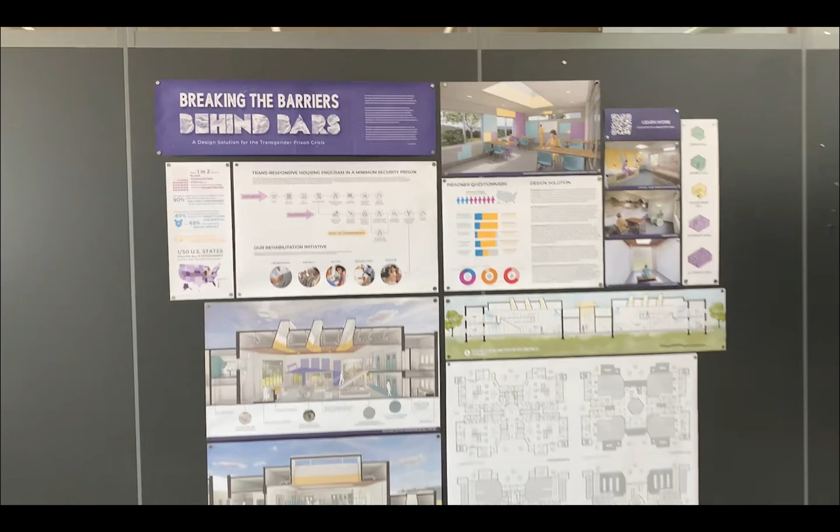I'm Mary Golden, the Undergraduate Program Director for Interior Design at Rochester Institute of Technology. We are delighted to welcome you all to our Capstone Defense session in support of Haley Giroux. To give a bit of context, Haley embarked on a self-generated design research project with the intention to respond creatively and imaginatively to an emerging circumstance, ongoing debate, and real-world issue relevant to the profession of interior design.

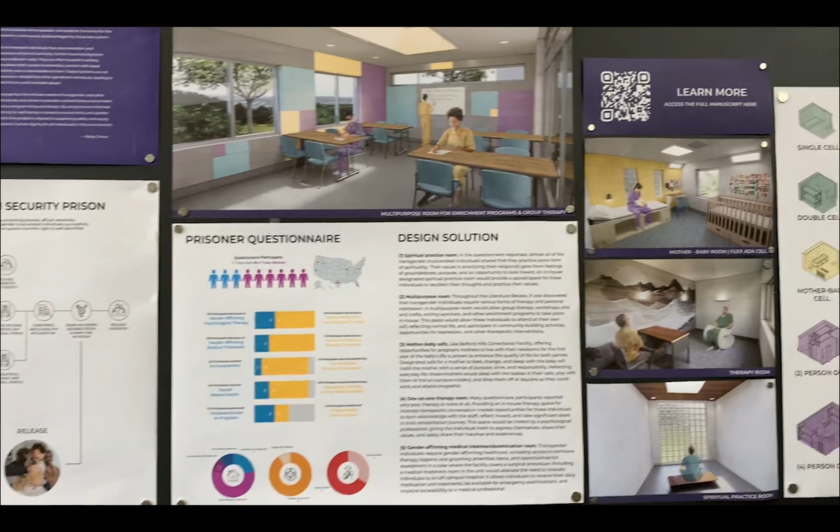She sought out and invited industry professionals to serve as her Capstone Committee members. The program is indebted to these remarkable individuals for their generous acts of service. On behalf of the program, thank you. Haley will introduce her committee in just a few moments. At this time, I would like to introduce our examining scholar, Barry Halperin. Barry is a principal architect at Beardsley Architects and Engineers in Syracuse, New York. Barry, thank you for joining us today.

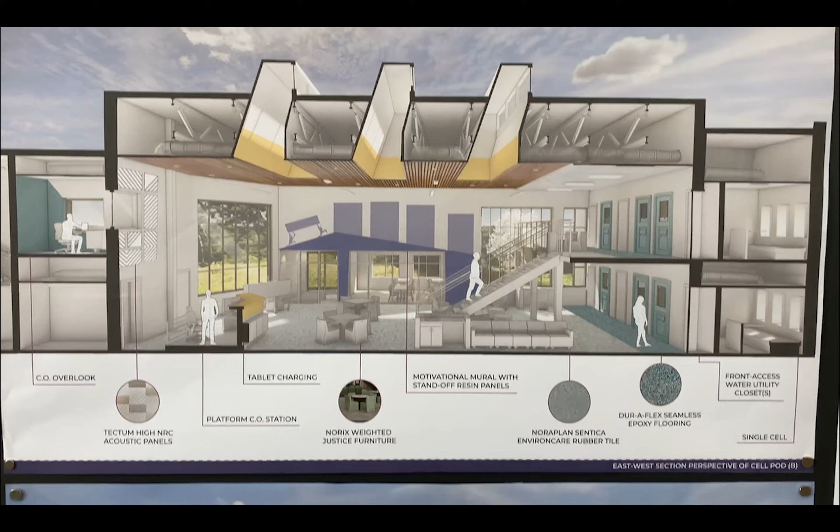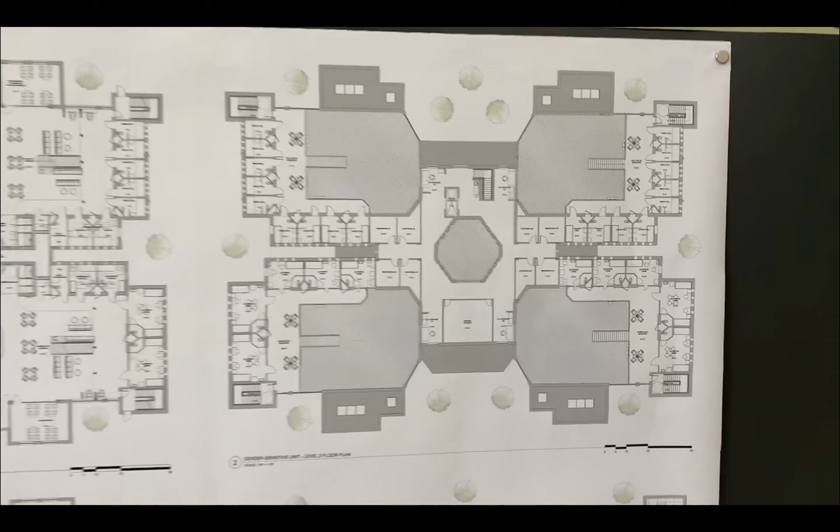Barry will begin the 15-minute cross-examination following the 30-minute student presentation, and the committee members are invited to provide their remarks at 5 minutes per person. To provide full focus on Haley, we respectfully request that all guests keep phones on silent and that Zoom and video microphones remain off for the rest of the session. Due to the formal nature of this presentation, we will not take questions from the audience. However, we do encourage everyone to reach out to Haley directly to share accolades and engage in conversation following the session. At this time, I invite Haley to present her capstone.

Everyone, my name is Haley Giroux, and I'll be presenting to you my interior design undergraduate capstone proposal, Breaking the Barriers Behind Bars. So I want to thank my committee for their guidance in this project, Mary Golden, our program director, Ann Weis, interior designer at LaBella, Adrien Moyer, the co-founder of the Transgender Resource Center in New Mexico, and Craig Johnson, a chief operating officer at Huther Doyle, and a special thank you to my consultant, Mark Kukuvka, a correctional architect at LaBella. So thank you all for being here today. We'll be touching on the question I'm trying to answer, the findings of the literature review and research agenda, and the creative agenda final proposal.

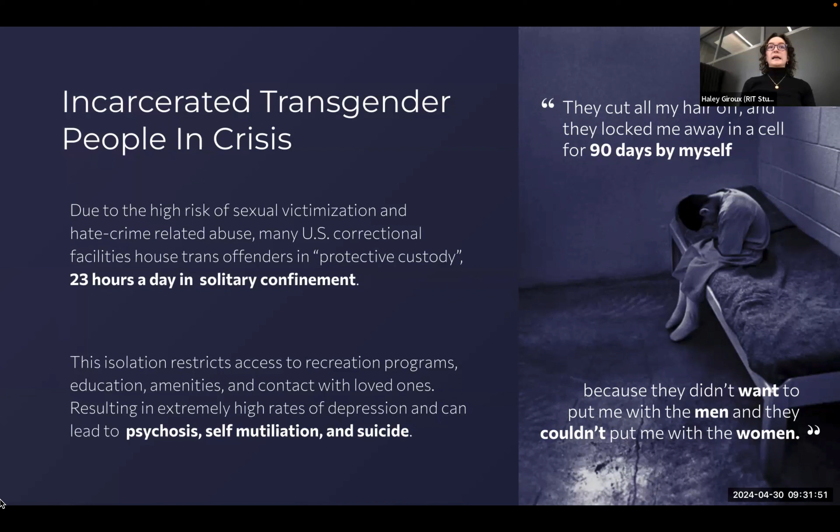So before we get into this issue, I do want to give a quick trigger warning that I will be mentioning sexual abuse. So the under-researched and controversial issue that I'll be addressing is the transgender prison crisis. Due to the high risk of sexual victimization and hate crime-related abuse, many U.S. correctional facilities have no other option but to house trans offenders in protective custody or solitary confinement, which is up to 23 hours a day. This isolation restricts access to recreation programs, amenities, and contacts with loved ones, resulting in high rates of depression and anxiety, and can lead to psychosis, self-mutilation, and suicide.

A study that was recently released in February of 2024 found that out of 280 transgender prisoners from across the country, 90% reported being housed in solitary confinement at least once during their incarceration. Separately, in a California general population unit, one study found that out of their respondents, 40% reported being forced into prostitution for survival, and 69% reported experiencing sexual assault.

Knowing about these struggles, in 2003, George Bush signed into law the Prison Rape Elimination Act, or PREA. This outlines 13 provisions to be followed in correctional facilities to protect this population. Only one out of the 50 U.S. states follows all 13 provisions. PREA states that placing a trans prisoner in protective custody is prohibited unless there are no available alternatives. And it's clear there are no available housing alternatives. So the question I want to answer is, can prison housing be reshaped by trauma-informed and gender-sensitive design principles to improve the security, well-being, and rehabilitative potential of transgender prisoners in the U.S.?

Now let's get into the findings of the literature review, which fueled the creative agenda. I explored 6 to 7 areas of research, but for brevity, I will summarize the pieces that informed the design. So I found that the traditional prison environment can create trauma because of the architectural hierarchy and the lack of privacy and abrasive materials. It also forces individuals to conform to the male-female binary system. Prisons are historically designed to be a part of punishment, but the system still expects people to get healthy from an unhealthy environment.

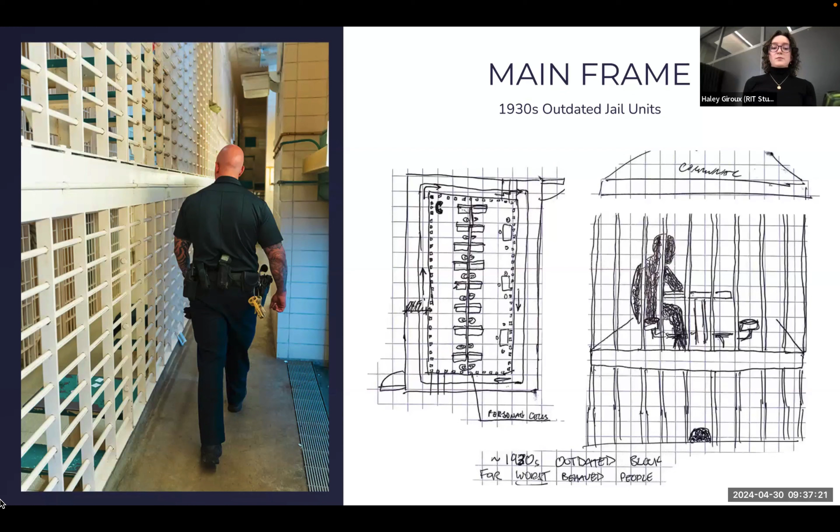This tour consisted of 2 parts. First part was the Main Frame, which was an outdated 1930s jail that housed the most abrasive prisoners. This environment was not conducive toward rehabilitation. It actually created opportunities for aggression and trauma response. The air was thick and it smelled bad, and the bars were sticky to the touch. And the sounds echoed so immensely that when the door closed, it reverbed from across the room.

The second part of this tour was the Tower Plaza of the Veterans Unit, which was opened in the early 2000s and was recently renovated. This environment was far more comfortable and the air was clean and fresh with a ventilation system. The newly installed carpet and ACT ceiling grid aided in the acoustics. But I noticed that there were still no windows in the day room.

The visitation phone call area was on the mezzanine, which wasn't conducive for ADA or differently abled individuals. And there were columns in the day room that created a lot of blind spots. And so these were areas to consider in the design proposal.

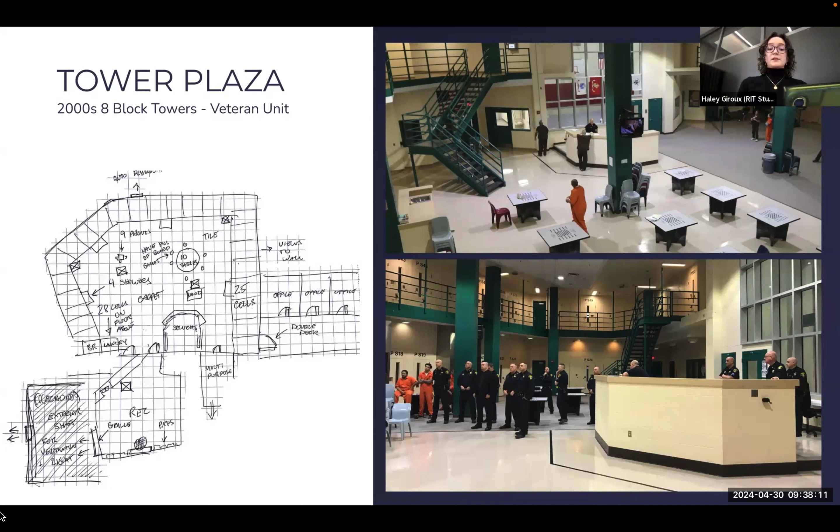Now, the last and very impactful piece of this research was a questionnaire I mailed to 22 different transgender prisoners across the country. This questionnaire gauged their gender identity, personal values, experiences with their living quarters, showers, and bathrooms, and their mental health. But for brevity, we'll review the stats that impacted the creative agenda, but if you'd like to learn more, please see the poster and the manuscript. So 10 out of the 22 prisoners agreed to participate in the study from all over the US.

It was found that most of the preoperative transgender prisoners were housed based on their biology, except for one trans man who was housed in the male unit and one trans woman who was housed in the female unit. Now, this trans woman was an outlier in this study because she was housed in solitary confinement for protection. She described her cell as having peeling paint and cockroaches, and she had poor gender-affirming healthcare amenities, and she still had to shower in a public shower.

Now, it was found that only 3 out of 10 transgender prisoners had access to a private shower, which conflicts with the Prison Rape Elimination Act. And we'll talk more about how the participants' input influenced the creative proposal.

Another piece of this questionnaire was I prompted the respondents to draw their living quarters. This discovered that some cells were so small that only one person could move at a time, and most of them reported only a slim barred window, and everyone had a roommate unless they were in solitary. These findings helped refine the scope of the creative proposal by programming spaces to match their personal values and take into consideration their experiences in their living quarters and shower facilities. So now let's get into the final proposal.

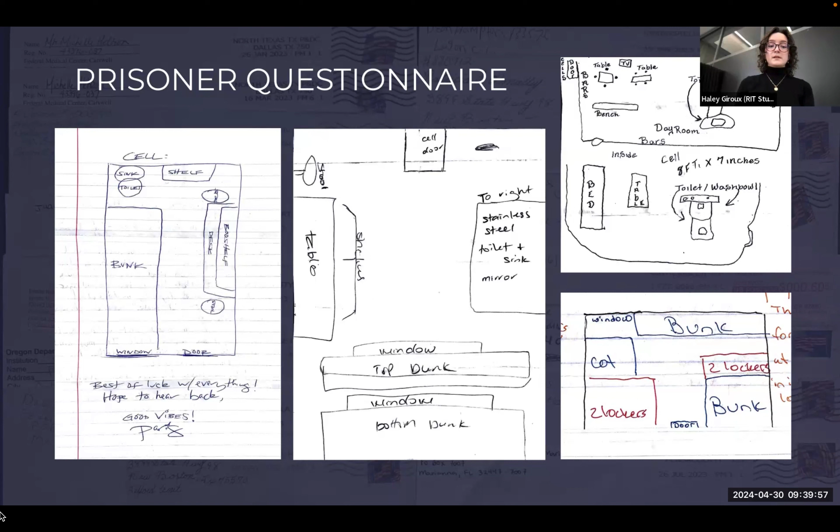I propose that a gender-sensitive unit model designed to be trauma-informed, gender-sensitive, and prioritize security and rehabilitation can help reframe the housing of transgender prisoners. The first decision that was made for this space was the model of the type of facility.

It was decided that a minimum security New York State prison was the ideal model for a gender-sensitive housing unit, and this is because a county jail's turnover rate is too high, and federal prisons house people that might be on life sentences, meaning they won't be conducive for rehabilitation and reentry.

A minimum security prison gives the designer the most agency to include gender-affirming programs, and the population is most inclined to want to be rehabilitated and returned to their families. An important piece of this program was, research shows that transgender individuals are often miscategorized when placed in facilities, so a program was created for this minimum security prison to address the housing assignment.

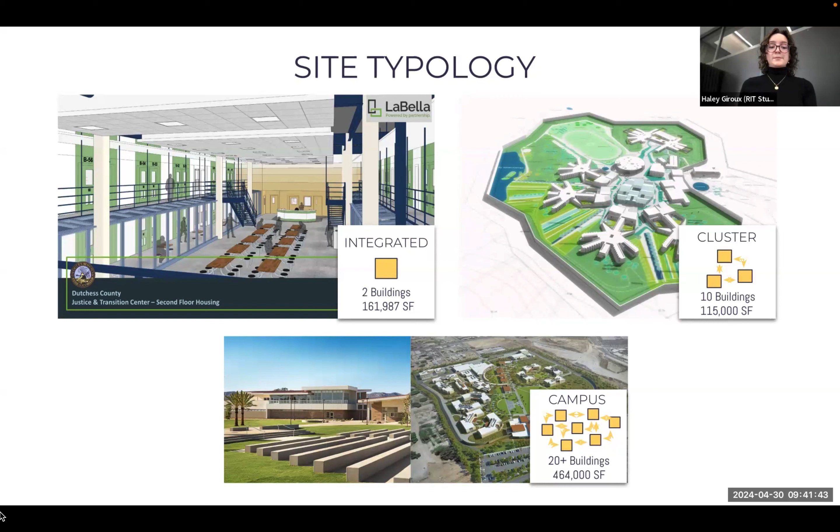So next is the site typology of the prison itself. After studying an integrated typology and a cluster and a campus typology, it was decided that a cluster campus would be the ideal model for this program. This is an example of a site of a cluster campus, and this basically means that there's a small array of buildings around a central focal courtyard.

This is an example of a cluster campus, meaning there are separate buildings that are rotated around a central courtyard, and each have different programs. So this site is conducive for rehabilitation because it reflects everyday life. Prisoners have the agency to leave in the morning for work and classes, walk around the courtyard to their destination, and keep a schedule that is similar to life outside of prison. Research shows that reflecting normal life gives prisoners responsibility and prepares them for life after release.

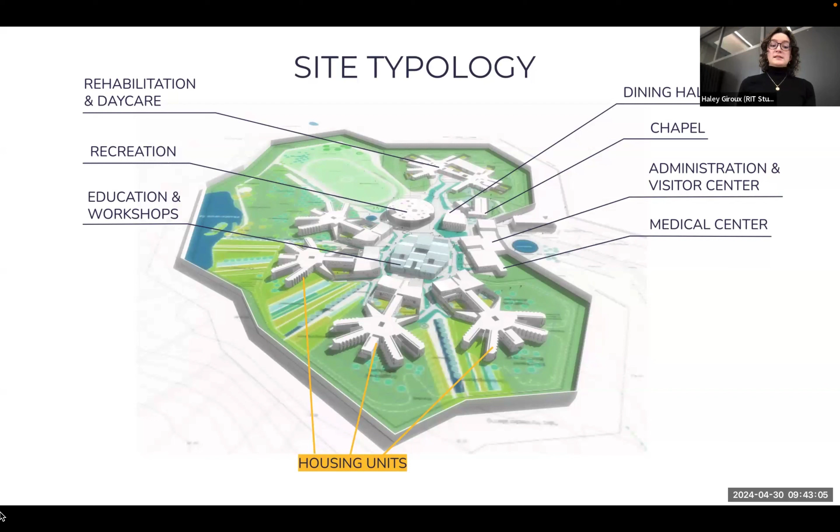Now, this project only proposes a solution for the housing unit, which is one of the many buildings on the site. This means that this space will mostly be used in the mornings and in the evenings before and after the workday. Now, this proposal is a replicable building that can be copied and pasted onto any New York State minimum security campus. This means that it can be used in a men's prison or in a women's prison, but not both. It is designed to use for either demographic.

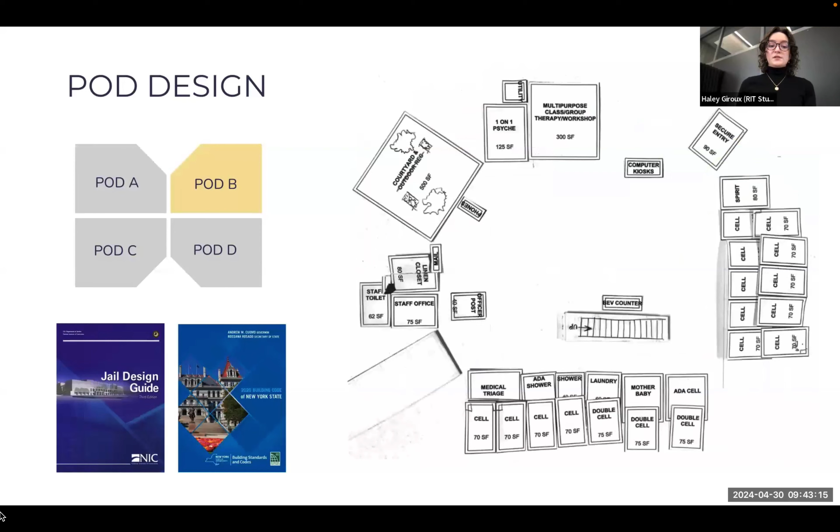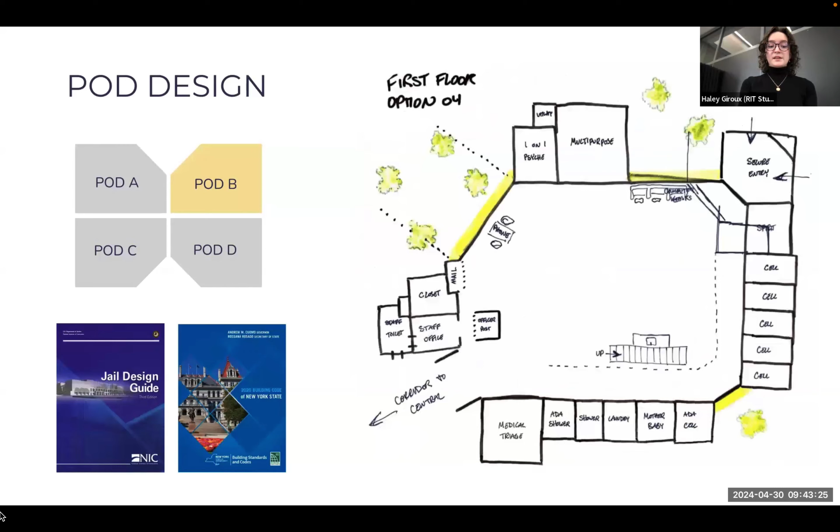So the design of this housing unit began when deciding on a 4-pod unit, each housing 20 prisoners. Using the jail design guide, the Building Code of New York State, and a sample housing program from a LaBella project, this program was assembled, allocating the minimum amount of square footage per space, then printing out these spaces to scale and organizing them like a puzzle, exhausting every solution until I found one to be the most successful, and bringing that up into 3D using foam.

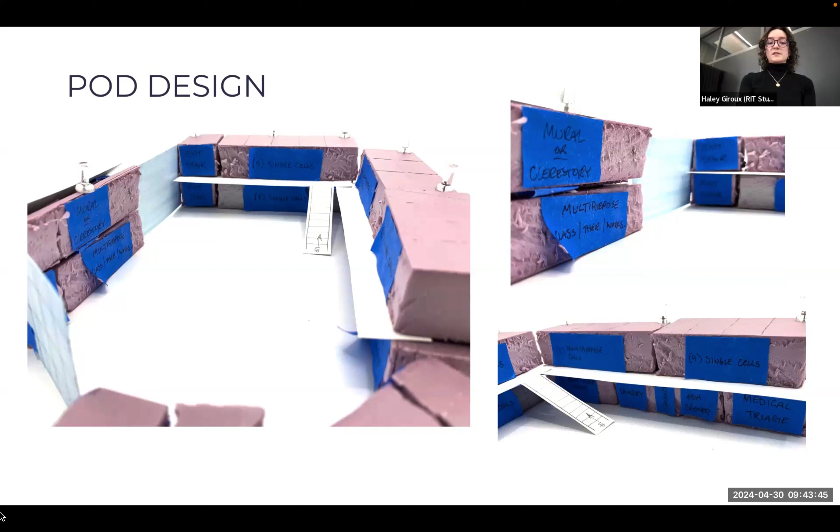So this foam model allowed me to design for vertical circulation, egress, architectural forms, space adjacencies, and circulation. So this is what an AI-generated rendering might look like of the exterior of the housing unit. Notice that the walking path leads from the center courtyard into the facility.

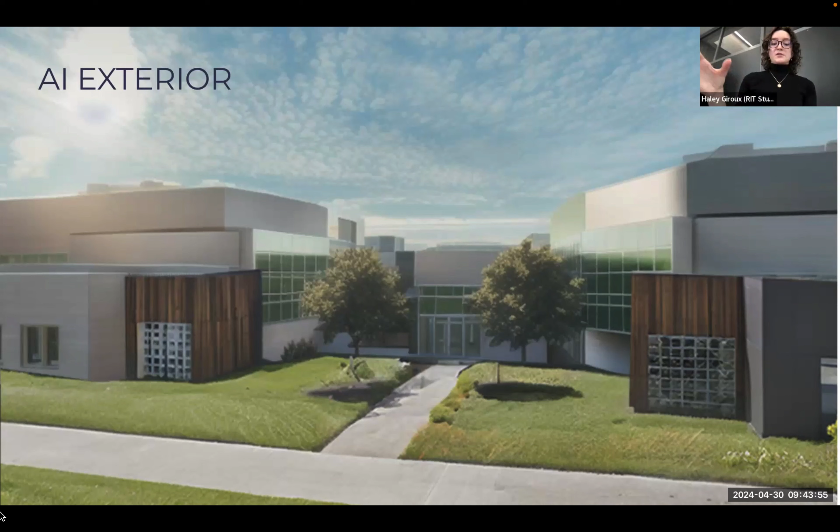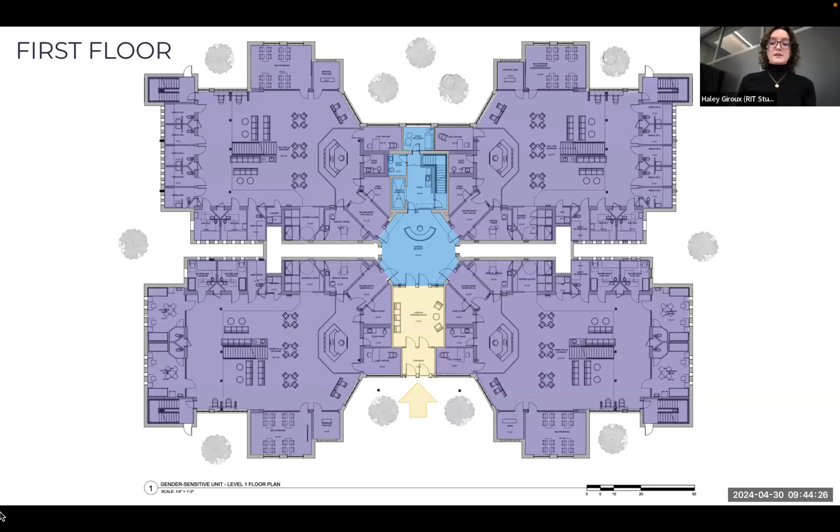The corridors in between the 4 pods are staff-accessible corridors, and the remaining symbols on the plan are trees, or what I like to call pocket parks, that are strategically located in the alcoves of the exterior of the building, allowing for natural views from the day room and the cells. So now I'll walk you through the program space, atrium, and we'll look at cell pod B first. Upon entering the housing unit, one will experience a small program space, and this is designed with lounge furniture and a prisoner-painted mural.

This space is designed to normalize the prison environment, making it feel less sterile, and creates a sense of place and belonging for the prisoners. It should make them feel like they are in a safe and familiar environment.

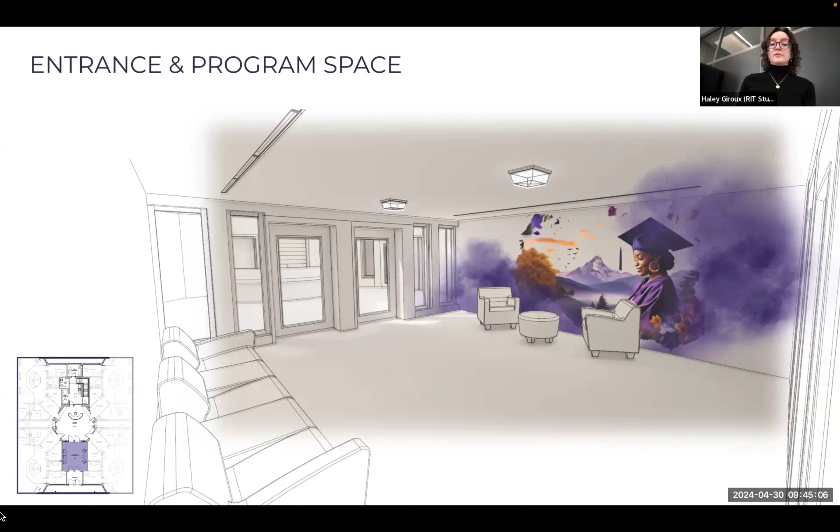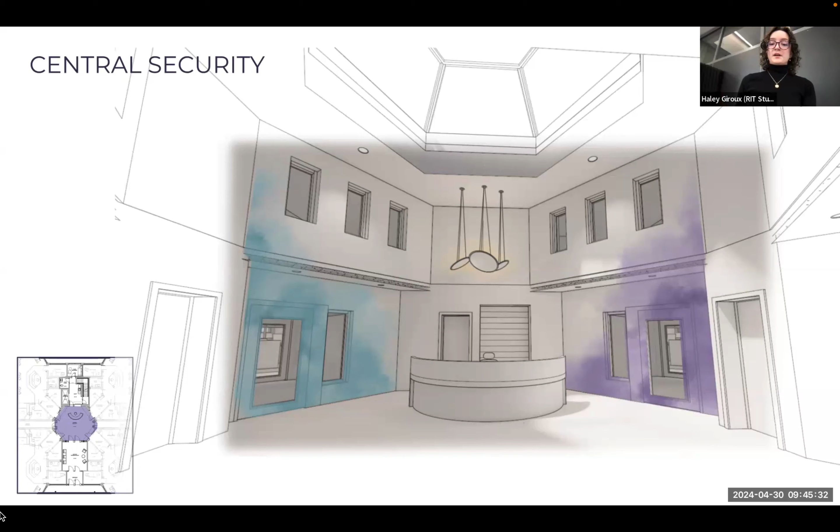Now, walking through the doors, you'll enter the central security atrium, and this is where the 4 pods and the staff back of house all meet in the middle. The space is designed to feel more like a reception or lobby space rather than an officer's overlook post, because a hospitality feeling can ease stress and reduce trauma triggers. Now you'll notice that the second floor windows overlook the atrium space, which is accessible through the doors behind the officer desk. So now we'll look at this in plan view.

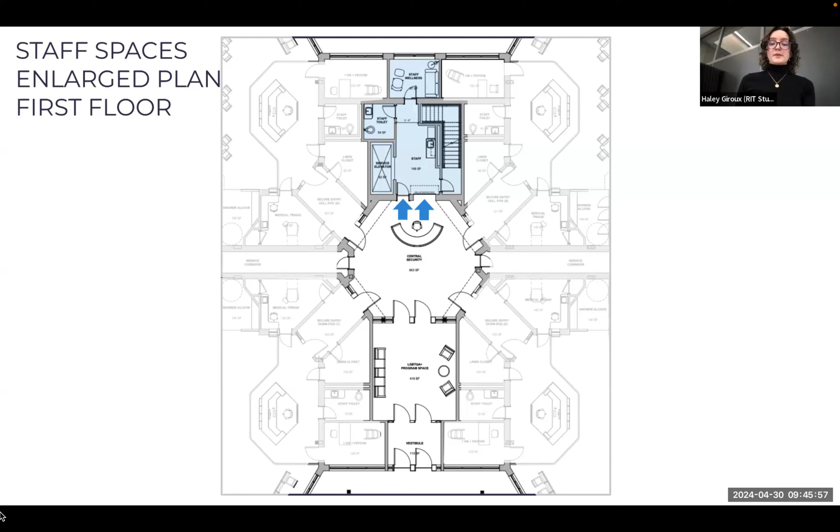You can see that there's 2 main entrances to this back of house space for the officers, and one is a door and one is a roll-up garage door. Now this roll-up garage door is for carts and other storage boxes to be moved into the service elevator. Other things that are included in this back of house is a staff bathroom, wellness room, and a kitchenette. There's also the stair that accesses the second floor, and we can see what that looks like here.

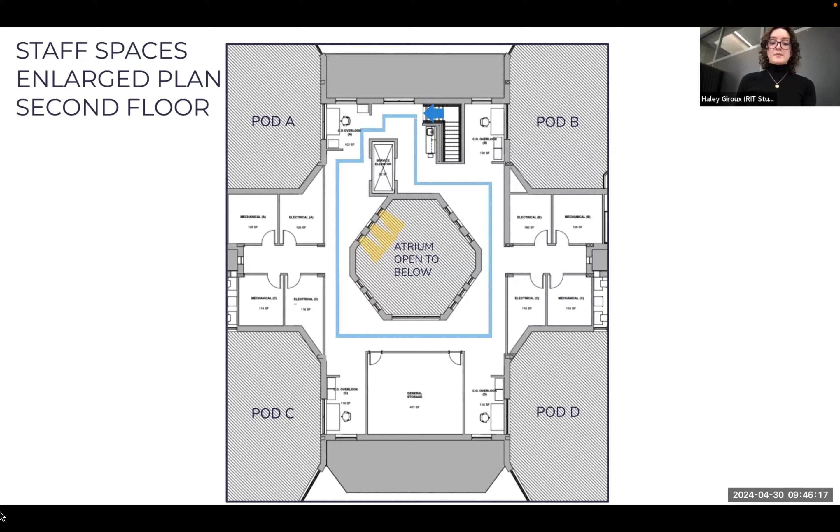On the second floor, this space is accessible to only the staff. The atrium in the center is open to below, and the windows located around the perimeter of the atrium allow for officers to circulate and monitor activity occurring in the central security room. This also allows for natural light from the atrium above.

Now, this second floor is extremely important to monitor the prisoners because each pod has a designated overlook. Each officer station allows officers to monitor the pods in alcoves, and these were designed to be alcoves rather than offices to improve the visual communication between officers that are collaborating on the second floor.

Now, the largest room on this floor is for general storage, which is accessible from the service elevator. The remaining rooms on this floor are mechanical and electrical rooms that are associated with each pod, and this allows workers to fix the mechanical and electrical problems without having to enter the prisoner pod.

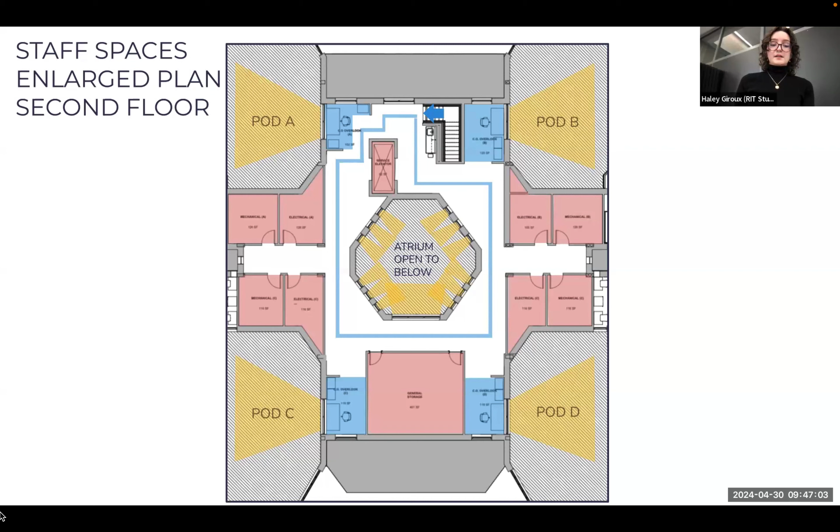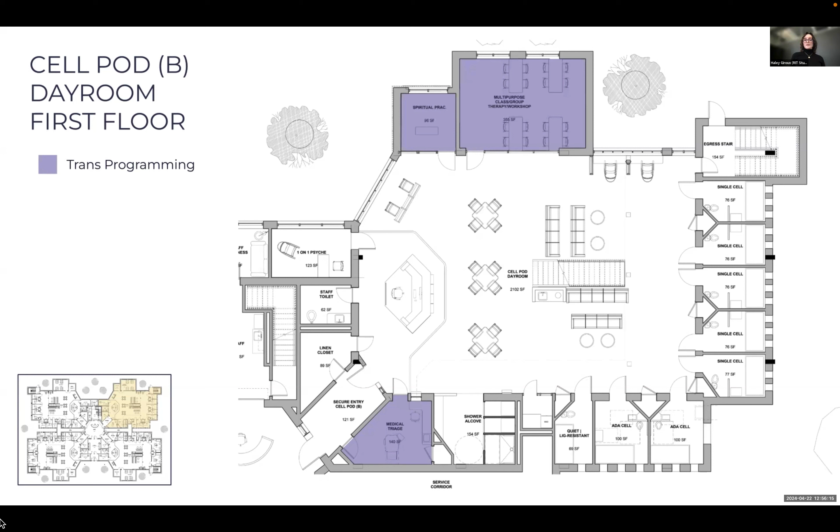The next room is the multi-purpose room, the spiritual practice room, and the one-on-one psych room, and we're going to take a look at that. The multi-purpose room is included in this proposal because it was discovered that transgender individuals require various forms of therapy, personal expression, and supportive community. This space is designed for group therapy, workshops, arts and crafts, writing seminars, and other enrichment programs.

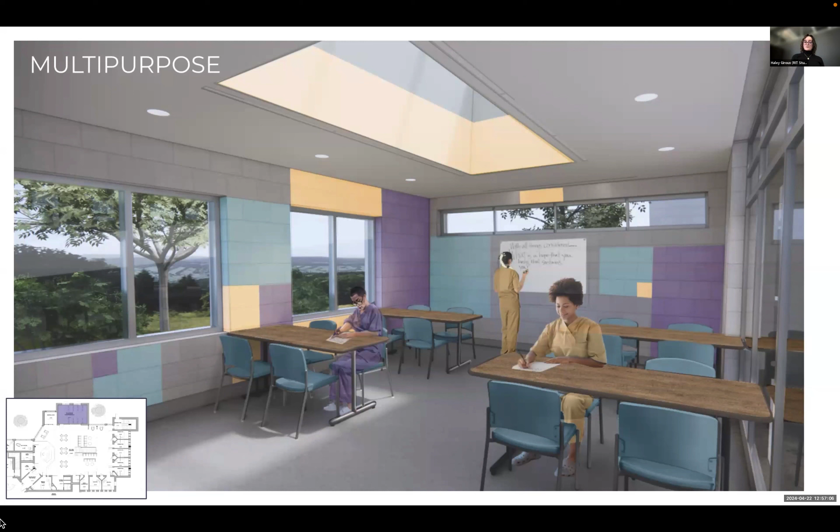This in-house program space would allow prisoners to sign up for events at their own will, reflecting normal life, allowing them to create more of a schedule, and by participating in community building activities, expressing themselves, and partaking in other therapeutic interventions, they can take greater steps in their rehabilitation journey. Now, the colors in this space reflect my research on color psychology. Yellow causes the body to release serotonin, blue is calming and can help reduce heart rate and blood pressure, and purple creates a sense of peace.

The next room is the one-on-one therapy room. Trans individuals require gender-affirming psychological therapy, so allocating a space for intimate therapeutic conversations creates opportunities for these individuals to form relationships with the staff, reflect inward, and take significant steps in their rehabilitation journey. This room was designed for flexibility. As discovered in the research agenda, allocating enough floor space for an individual to use a mat or sit on the ground to get more comfortable can help with their therapy session.

And the furniture in this space is flexible. The prisoner can use the desk for art therapy, rock in the rocking chair for sensory input, and the therapist can even pull in another rocking chair for a more intimate dialogue.

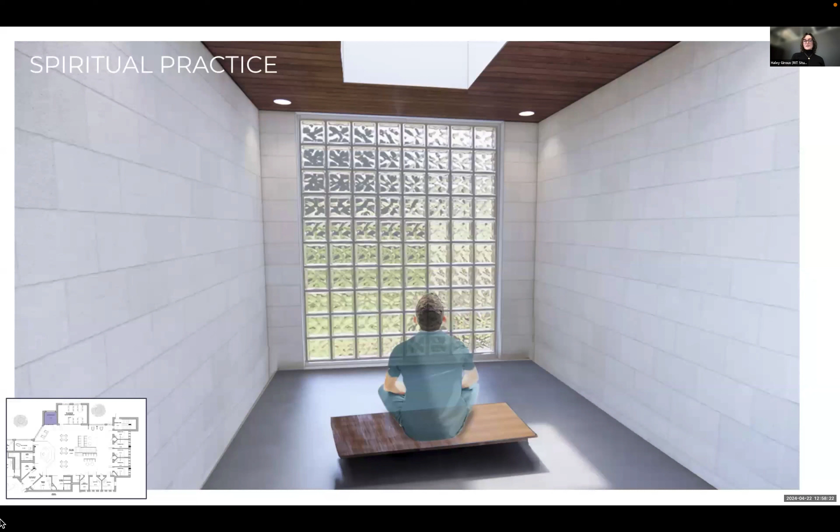Now, the last trans-inclusive space on this floor is the spiritual practice room. In the questionnaire responses, almost all of the participants shared that they practice some form of spirituality, and practicing their values instilled them with feelings of groundedness, purpose, and an opportunity to look inward. Providing these opportunities to individuals to express themselves and practice reflections are elements of trauma-informed design. Providing a safe environment for recollecting one's thoughts is proven to help reduce feelings of anxiety and irritability.

So now we've completed the first floor of these pods, and let's talk more about what the mezzanine looks like. The mezzanine consists of 5 single cells on the east wall and 4 double cells on the south wall. The mezzanine itself is designed with floor-mounted game tables to help normalize the environment, and it was designed with considerations of the jail design guide, which states that dead-end mezzanines must not make path of travel longer than 50 feet. So let's take a deeper look into the housing spaces.

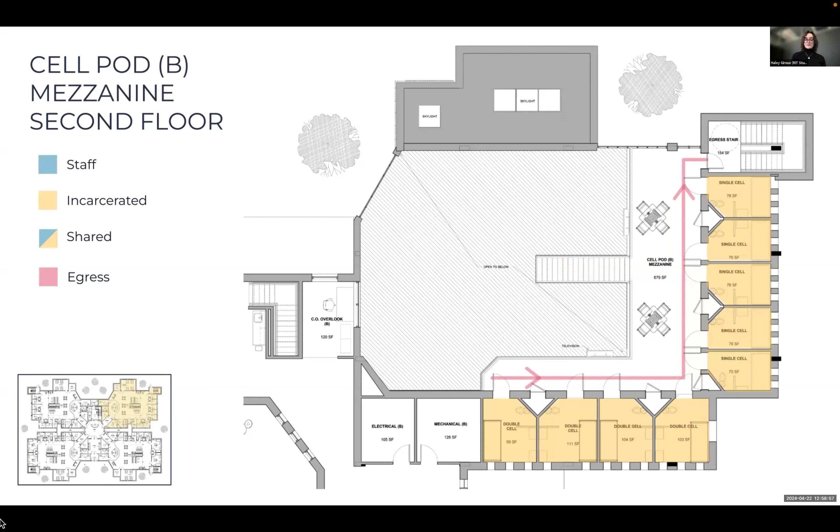There are 5 types of spaces in this proposal, and this is because individuals on the gender spectrum may need to move around and select different types of housing that are more conducive to how they prefer to live. So the first type is a single cell. This design took into consideration the questionnaire responses that stated that the toilet unit would be located right next to their face as they were sleeping.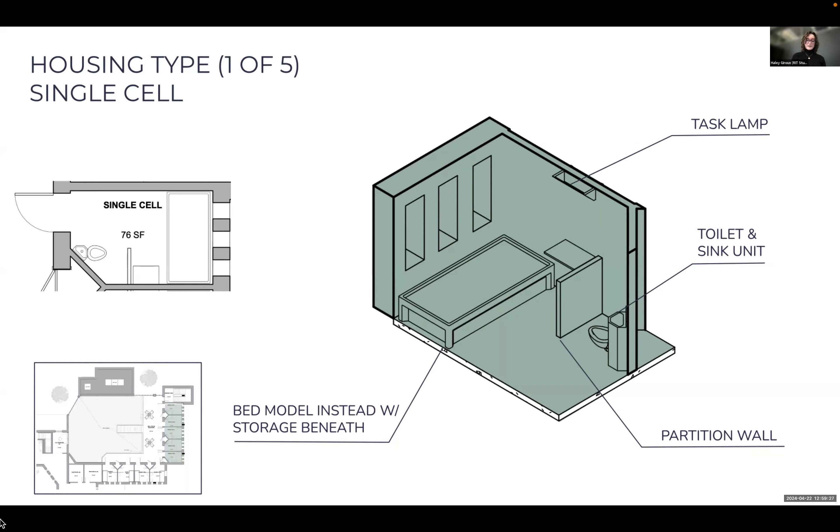So this design includes a small 6-inch brick and mortar partition wall to zone out the room to be more comfortable. Next is the double cell. Using the same principles, the desk and work areas are segregated from the toilet unit and include adjustable task lighting. Trauma-informed design principles include adjustable task lighting to give individuals agency in the space, letting them control the level of light produced in their room.

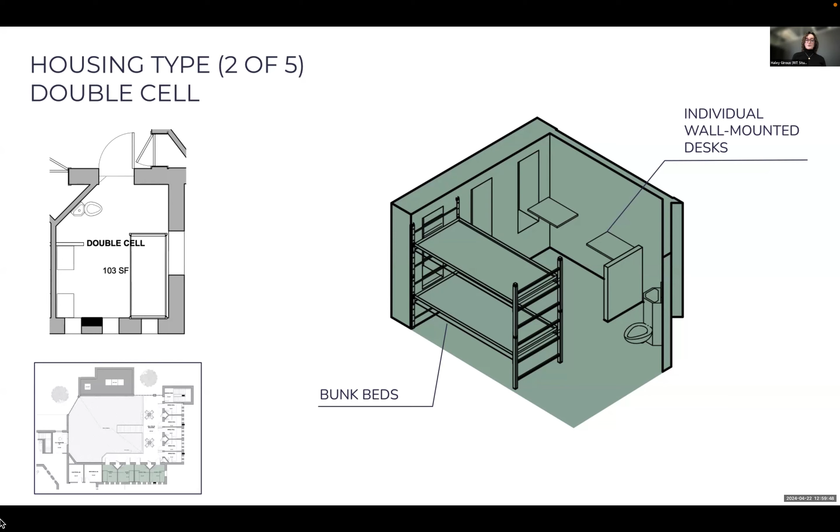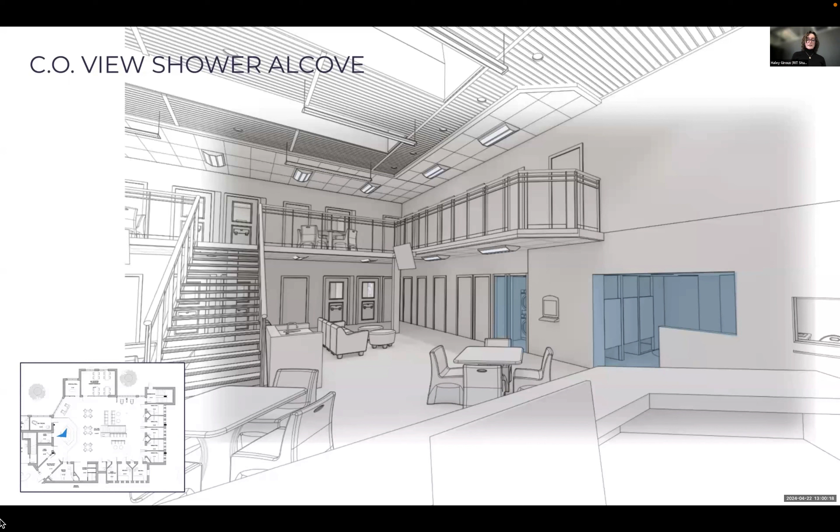So this unit is now complete, but it's important to talk about the lines of sight that were considered to allow the COs on the first floor to better monitor the day room. Now, in a 3D view, we can see that the officer's point of view has clear sight lines into the shower alcove and the laundry room. Now, the alcove is highly monitored to reduce the risk of sexual victimization, although each shower stall has room for changing and showering in private.

Now, looking straight forward in the day room, you'll notice that there might be blind spots behind the mezzanine stair and in the back corner near the egress stair. Though the day room used to have columns spanning the room, causing more blind spots, that issue has been alleviated through dispersing the weight of the building in a truss system rather than columns. Though these spaces still are not as visible, it would be important to include cameras in these areas for surveillance.

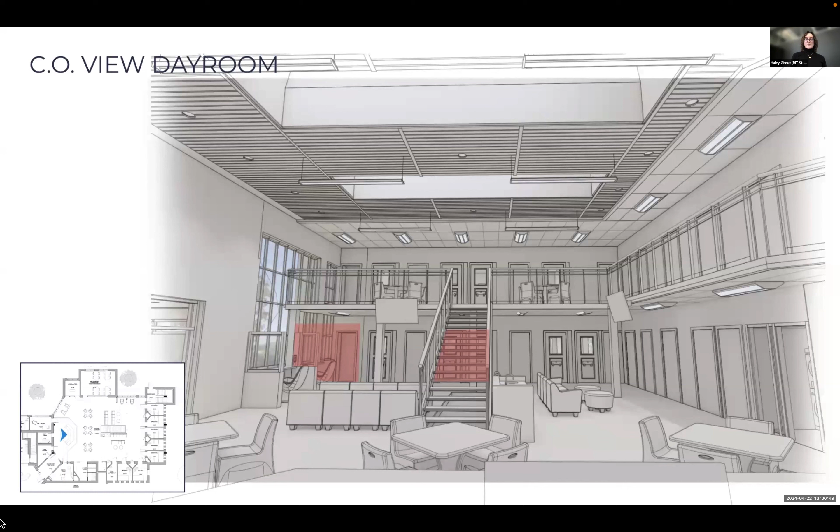Now let's look at what the materiality might look like in these areas. So a section cut of the cell pod depicts material selections, acoustical treatments, the truss system, and the day room skylights, as well as the CO overlook. All the furniture is Norix weighted poly detention furniture, and the day room flooring is Noraplan EnvironCare rubber tile. The housing flooring is Dur-A-Flex seamless epoxy flooring.

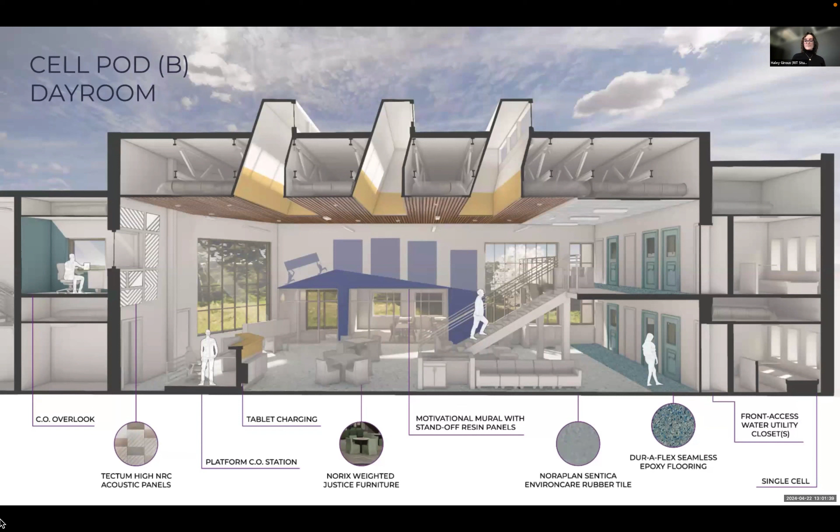Now, the day rooms were acoustically treated with Armstrong ceiling infill panels and Turf Tectum high NRC acoustic panels on the wall. The feature wall above the program rooms can feature a motivational mural with standoff panels, and these panels can be rotated and replaced and can even feature prisoner artworks to better create a sense of place and belonging in these pods. So this completes the cell pod, and now we'll review what's different in the dorm pod.

So in the dorm pod, what differs the most is the ADA cells, which now have become mother-baby cells. Inspired by the Bedford Hills Correctional Facility, offering opportunities for pregnant mothers to live with their newborns for the first year of the baby's life is proven to enhance the quality of life for both parties. Designated cells for mothers to feed, change, and sleep with the baby will instill the mother with a sense of purpose, drive, and responsibility. This is an extremely valuable opportunity and has proven to reduce recidivism rates in mothers, instill a deeper bond with loved ones, and reflect normal expectations of post-release life.

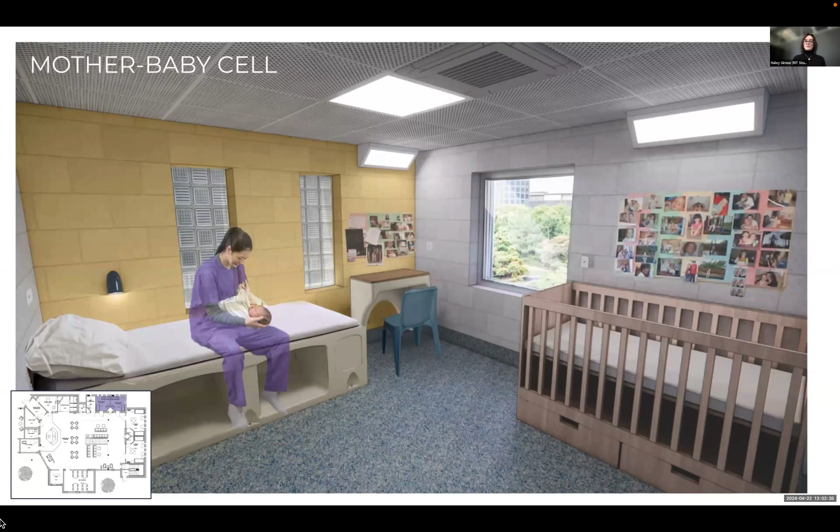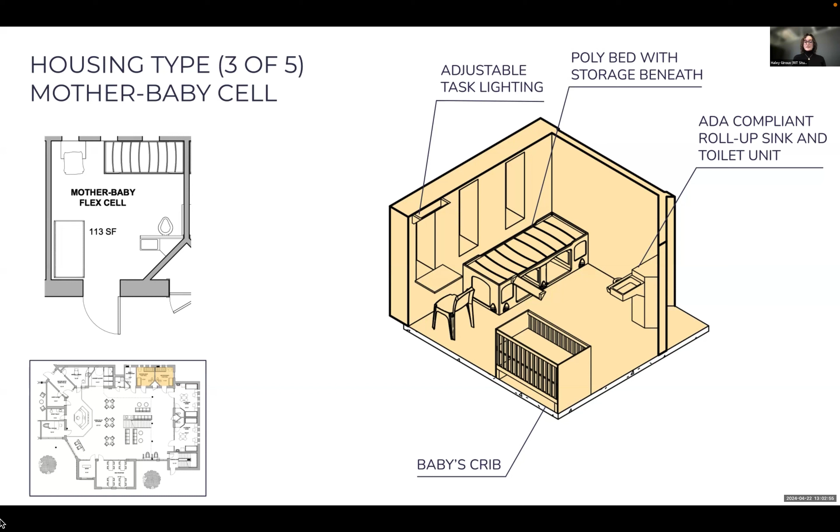Additionally, this visualization is an example of the Paint a Wall program. Prisoners can paint a wall in their living arrangement after a certain amount of time and for a small fee. And this will help affirm their gender expression and allow for more opportunities for personalization. Now, the mother-baby cell was designed to be ADA compliant. With the removal of the crib, the cell is only slightly larger than the cell pod's ADA cells. This comes into play when there are no pregnant mothers that are in need of housing, and the unit is replicated on a male campus.

So moving to the mezzanine, let's look at the housing solutions there. Instead of cells, there are 2-person dorms and 4-person dorms, but still keeping the 1:20 ratio similar to the cell pod. Now, the 2-person dorms feature more Norix furniture like wall-mounted poly shelving, a wardrobe, and freestanding desks. The freestanding elements allow the individuals to move around the desks and the wardrobe, giving them opportunities for personalization in the space.

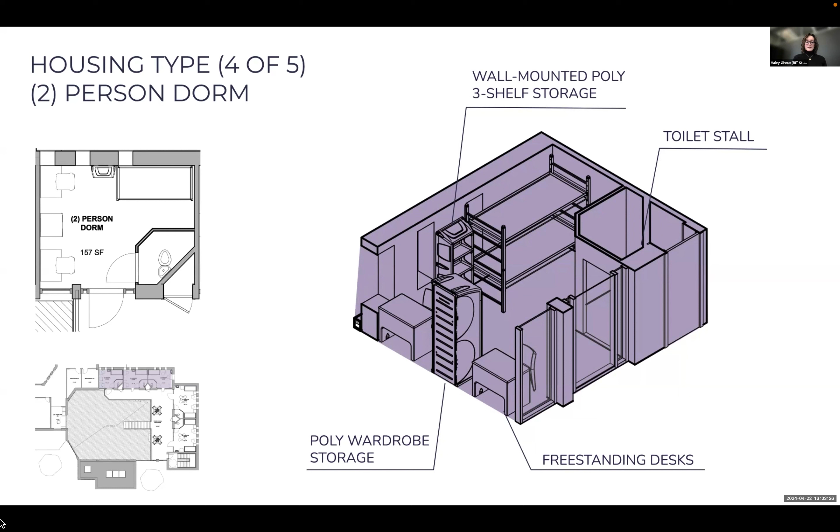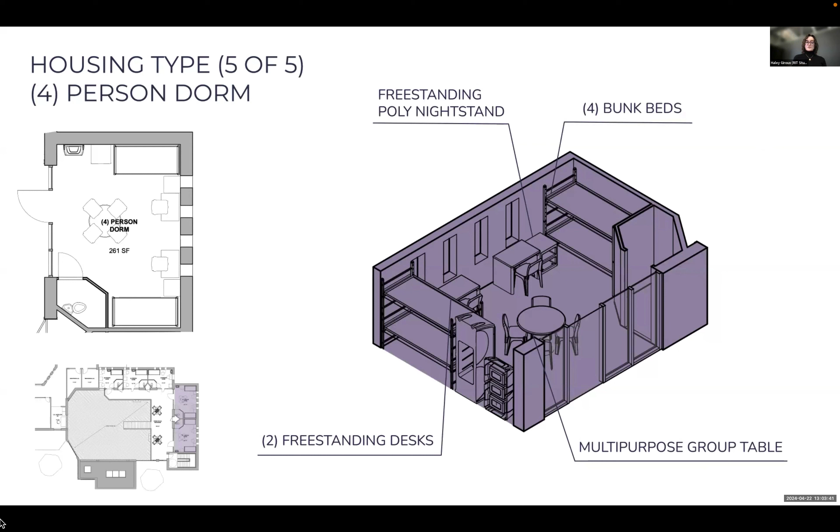Now, the 4-person dorm is the largest housing option, and the dorms are designed with a small in-house toilet and sink stall. The door to this bathroom stall still allows for officers to see 18 inches above and below the door, and the dorms were all designed with attack-resistant storefronts for views from the CO post, which we can see coming into play here on the mezzanine. The storefronts allow COs to see the arrangements inside of the rooms.

So now let's look at the materiality of the dorms. All pods include a wall-mounted commissary computer. The ceilings that might be accessible to prisoners are Gordon Cel-Line tamper-proof security ceilings, and the lounge spaces are designed with durable Tarkett Powerbond carpet. And the mezzanine stair can be customized with powder coat on the stringer and open grate treads.

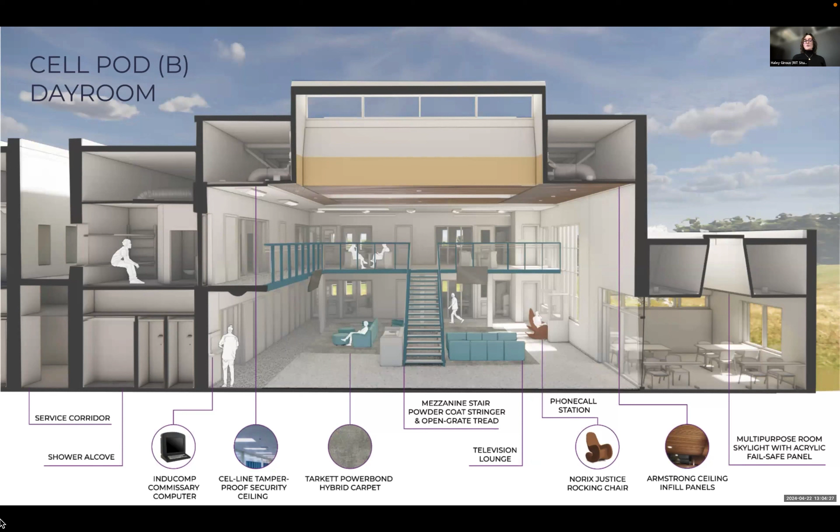So as we come to a close, I do want to reiterate the amount of potential that a design like this may possess to have a meaningful impact on this desperate population. About 1.4 million people in the adult US population are transgender, and studies show that at least 1 in 6 transgender people have been incarcerated at some point in their lives. That's over 220,000 individuals that face or have faced the injustices of traditional prison design. So this capstone hypothesizes that a gender-sensitive unit that is reshaped by trauma-informed and gender-sensitive design may provide safe housing, increase rehabilitative potential, and restore basic human dignity.

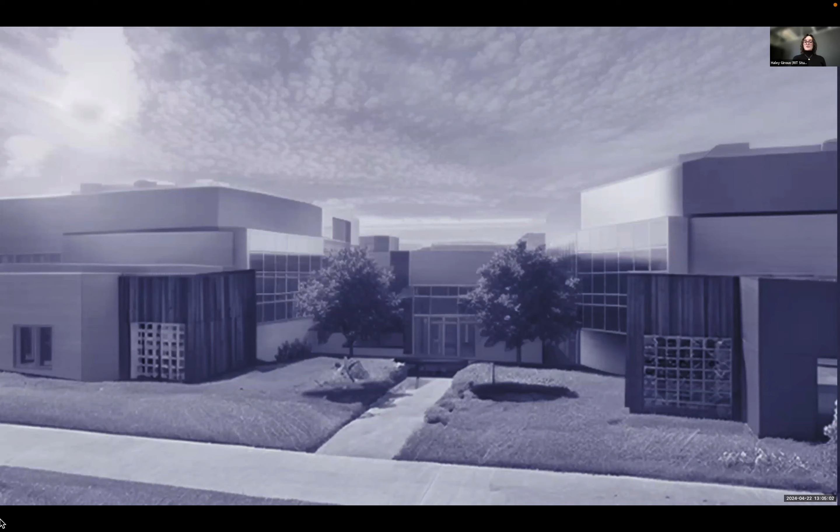So I want to invite my cross-examiner on Zoom, which hopefully you were able to see all of it this time. And I'd like to hear your feedback. Yeah, I think you're talking to me. This is Barry. Hi. Hi, Barry.

Yeah, my feedback, I guess some of the things that you spoke about and some of the things that you showed during the presentation, I think evolved a bit since whatever the package was that was sent to me. But I had a series of questions and comments that I wrote down and didn't put in the proper forms, I think, and I may have to send it afterwards. But one of the things that popped into my head was just to understand context is the percentage of the prison population as a whole, what kind of percentage is that? Meaning to give us context about whether we want to make dedicated pods or not in future, since you said the idea was scalable. Do you know that number?

I do know that in the US, we have tracked over 4,200 transgender prisoners in 45 different states and Washington, D.C. So if you find that 4,000 is a decent percentage, then it's a possibility. Yeah, okay. Well, that tells me something. You gave us the typical ratio of COs to inmates, which I didn't find in the written stuff that I reviewed, so that's helpful.